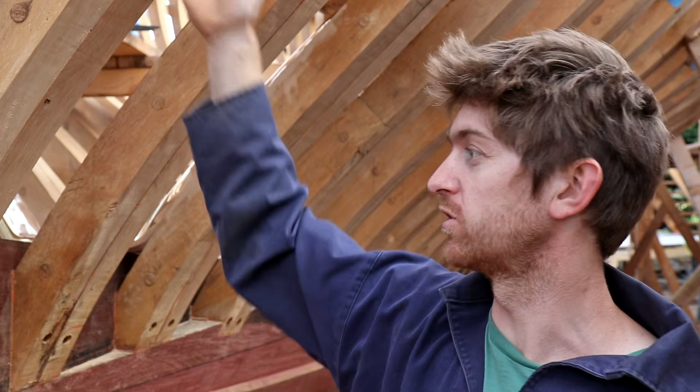This week we're going to be focusing on lining off the hull for planking, and what that means is the process basically of working out the position and the widths of all the planks which are going to lay on the frames here. Now you may think you could just slap them on any old how, or just start from the bottom and work up, or even take the whole width and just divide it equally, but actually it's not as simple as that. You can do, but you'll end up in a mess.

There are few things that do as much to accentuate the beauty of a wooden hull as well lined off planks. Alas, the opposite can also be true. A poor lining job can make the best design seem out of balance, the finest construction appear slipshod and suspect. Worse, inattention to plank placement can cost time and waste material.

Above the waterline you will be able to see the plank seams through the paint, so in that area it's important to keep all the planks relatively the same width in any one place, and they will all have to taper down smoothly to be slightly narrower on the ends than they are in the middle. Below the waterline it's more about conserving the planking stock and also making it easier to actually hang the planks.

But before we can line out, we've got some preparations to do, and we've got to meet the newest member of the team. She has just joined us and she's hopefully going to be here for the long term in a bit more of a sort of apprenticeship style role.

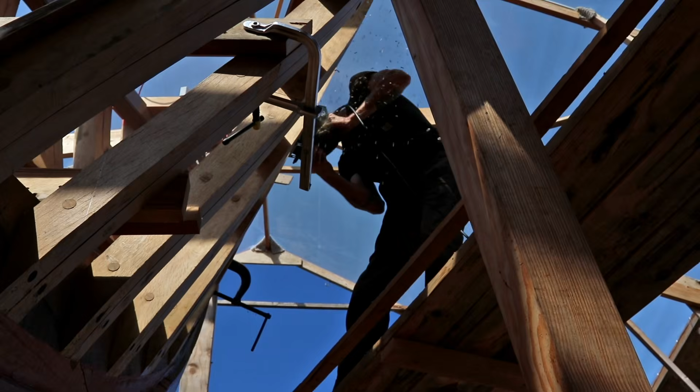Hi, my name is Rosie, and I came up here from Portland, Oregon, where I was most recently working at a door and window shop, and before that I was working in construction. I grew up in Boston, and I heard about the Tally-Ho project from a friend of mine at a boat building school in Spain, where I spent a little bit of time last year. Part of the reason that I came up here to work on this boat is that I've had an interest in boats for a long time.

I grew up sailing around Boston with my dad, and I've been working in carpentry for a little while now, and it's kind of a dream or a goal to transition into the boat building industry, which is why I'm hopefully going to be up here for the long term and stay around and learn a lot from different people who come and work on the boat.

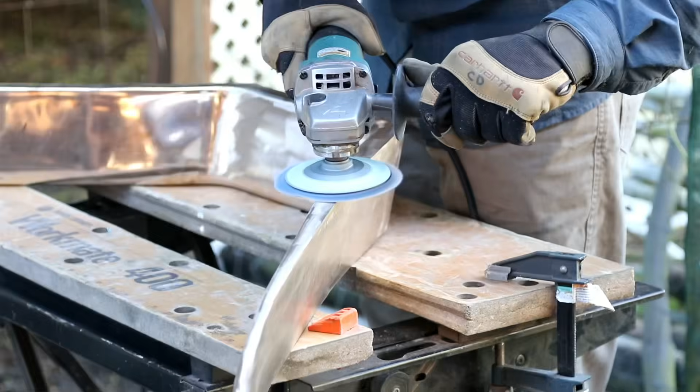So he said just give it a thwack? Yeah. All right. I think it sat down a little.

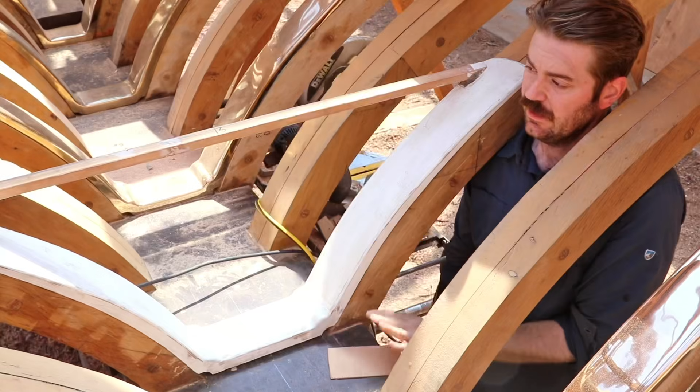If you recall back to the video where we actually made these, we made them sit about 1/8 of an inch off the keel timber. We were trying to game the shrinkage of the bronze, so we thought that if we built it 1/8 of an inch off the keel, it would shrink just enough to drop down.

Well, it turns out the mold swell actually counteracts any of the shrinkage that we're seeing, so most of our finished floors, after we get them back and we put them in the boat, sure enough, they're riding about 1/8 of an inch high. So something we're considering doing is going back to the patterns that we haven't cast yet and adding just another piece of door skin to the bottom of the keel plate which would then make them sit flush when we get them back from the foundry.

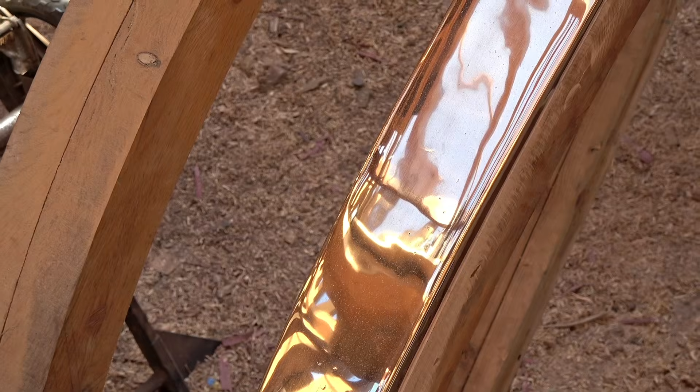I am just working out how much stock I need to buy to make some battens for lining out the boat for planking. The size of the battens we need, how many we need, and how much material I need to buy to make them, and how we're going to make them. And I need to make them before the weekend when we're going to hopefully line out.

So one of the things which really helps when lining out is having quite a few very, very long battens. Now I've already got a couple which I made when I was doing the lofting, but the more the better, so we're going to make a few more. And I decided to do an experiment: rather than trying to find some nice clear grained fir or something else to scarf into battens, I thought I would try layering up lots of sheets of door skin instead. Basically just to see if it might be a faster and cheaper way of making those long battens.

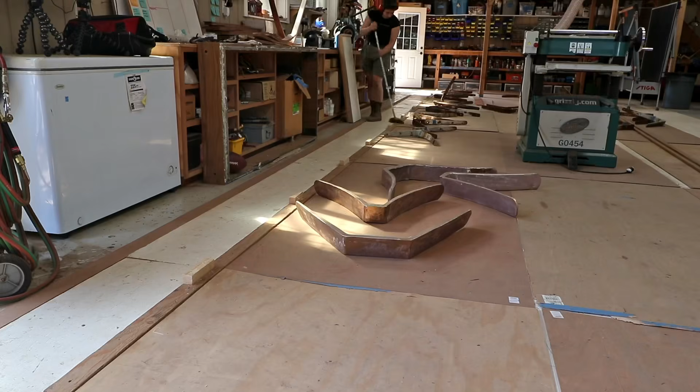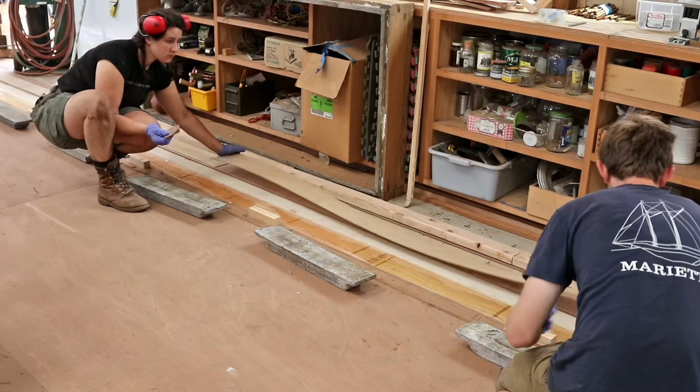So we've basically stacked up 6 layers of 1/8" plywood to make a 5" wide by 48-foot long batten. The next step is to cut the rough edges off it and then cut it into thinner strips, thinner battens, which will be a little bit more bendy. We do already have one very stiff long batten, and later on you'll see why we need that. But I'm hoping to get 3 or 4 thinner battens out of this lamination that we've just made.

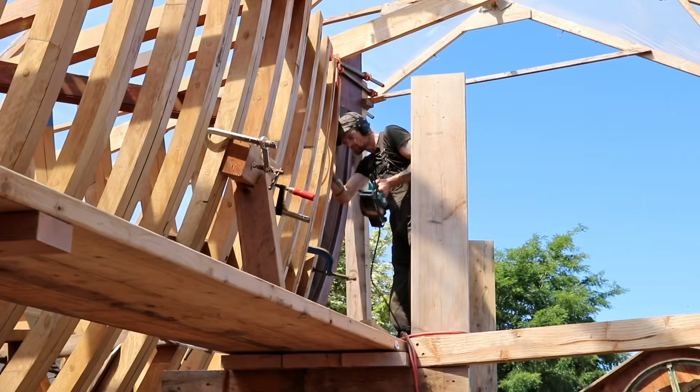Oh, Pete, it's my first day on the job. You're going to make me say it, aren't you? You don't have to say it, Charlie. Yeah, what am I doing? That's it. Do you want me to answer that? Yep.

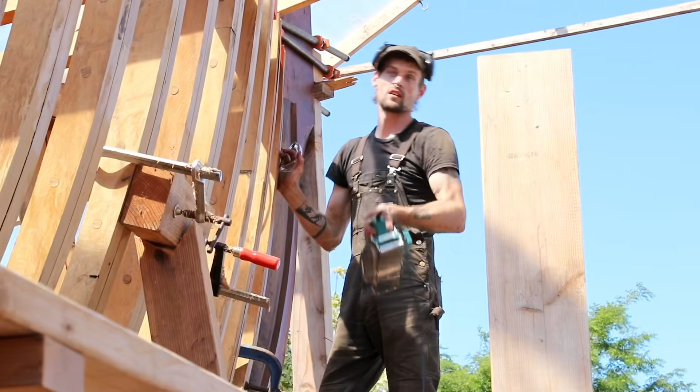Yeah? In preparation for planking, we're hoping to line out in a few days, so got some staging set up this morning. Feels pretty good to be off the ground. Just taking care of the topsides, which is kind of the most important part for making the boat look fair. It's all important, but this is really where it's going to pay off.

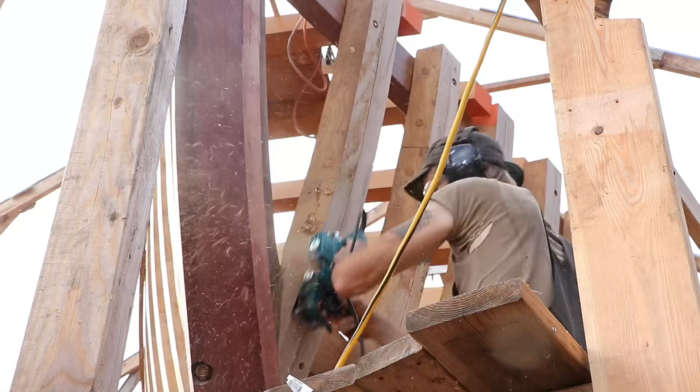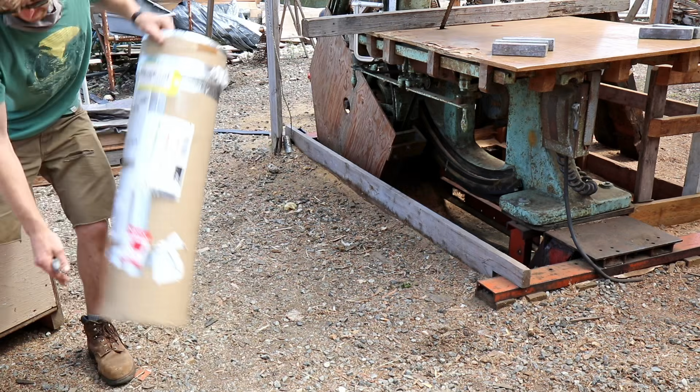Anyway, a couple of months ago I posted in that group asking for some suggestions on something I could use to cover the ship saw from the elements. Now I was only really expecting a few ideas, but a bloke called Aaron got in touch. He's a canvas worker and cover maker in Swan Reach in Victoria, Australia, and after a couple of emails and a few weeks, this arrived in the post today. So as you can see, Aaron has made a really nice cover for the ship saw.

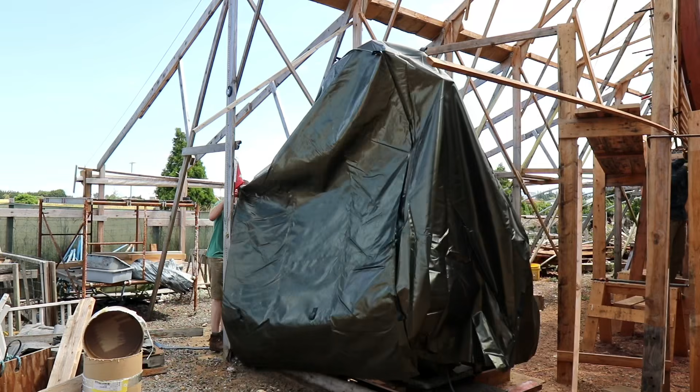So lining out is basically the process of determining the location and the sizes of all the hull planking. The first objective is to make planking easier by having planks that do not have excessive edge set or twist or too much bending really in any direction, and especially bending in and then out again.

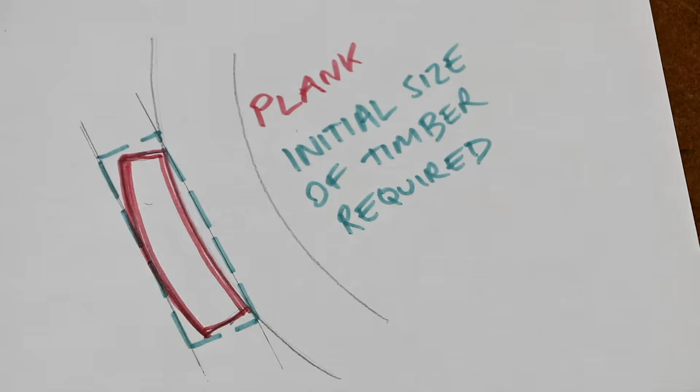Well, that might happen. Another objective is to have planks that are narrow enough to be able to plank around the tight corners of the boat, whether that's the concave corner of the tuck or the convex corner of the turn of the bilge, without having to carve too much shape into each individual plank and therefore losing a lot of width of the planking stock.

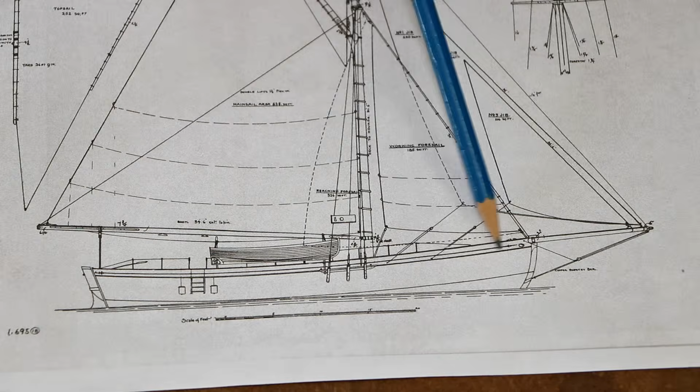As well as all that, the planks on the topsides of the boat, that is above the waterline, have to taper elegantly from midships, where they're at their widest point, down towards either end of the boat. They have to all be roughly consistent in width, and they generally have to create lines which are pleasing to the eye and complement the boat's shape.

I'm Tim Lee. I'm a member at the Port Townsend Shipwrights Co-Op and the lead boat builder on the Western Flyer. I heard Leo had planking coming up. I've done quite a bit of lining out. I used to teach at the Northwest School of Wooden Boat Building, so I built several boats. And I just asked Leo if he'd ever lined a boat out before, and he said he hadn't, and if he wanted help. So I came over to spend the day helping him line out.

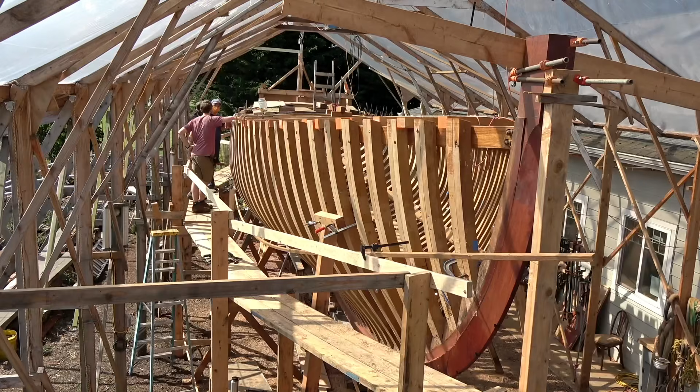What do we need, Leo? Well, that's Tim. What do we need, Tim?

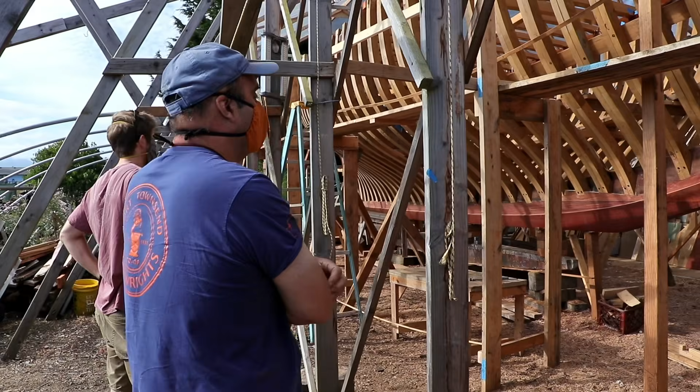You guys got your battens? Yeah. I would like to look at the pictures too, because I want to check and see if your sheer strake is wider. It is, yeah. Your broads, they're slowly getting wider. I see. But yours look like they were all about the same width. Yeah. So what I was thinking we could do is use a plank scale to do the top half and just get a number, and then do that section above your broads the same way. And so they would all be the same.

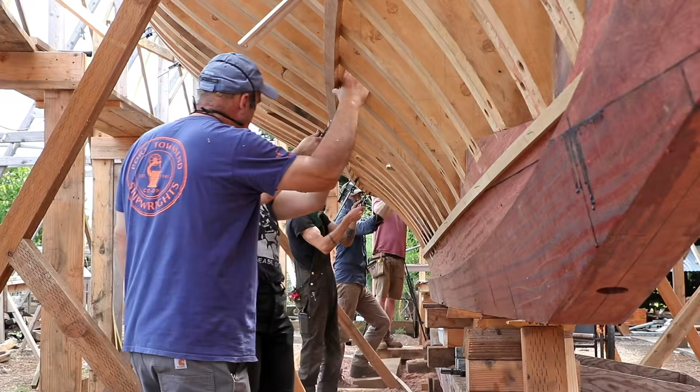In terms of the actual method, there's many ways to line out a boat and there's many places to start, but many boat builders agree that the tuck line is a good place to start. This is a line that starts somewhere in the tuck, just underneath the transom, roughly around the waterline or a little bit below, and then it follows the shape of the boat down well under the turn of the bilge, and then comes up in the bow, again around or just below the waterline.

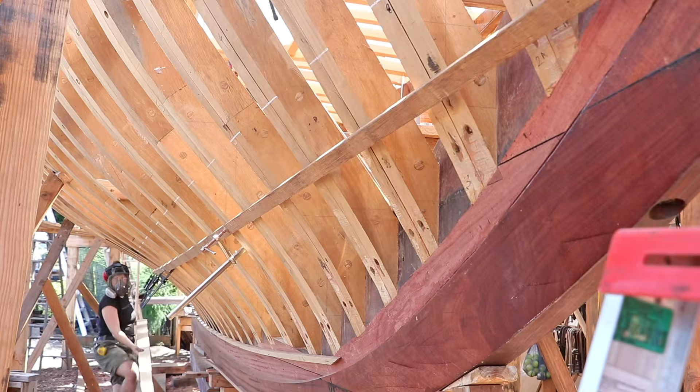The purpose of that line is really to separate two different areas of the hull, which have different characteristics in their shape. And when finding that line on the hull, it's important to use a very stiff batten so that you can find a line that isn't going to have too much edge set in a plank, it's not going to have too much twist, it's going to be a nice easy plank to lay, because that will dictate the plank that goes there and the planks around it.

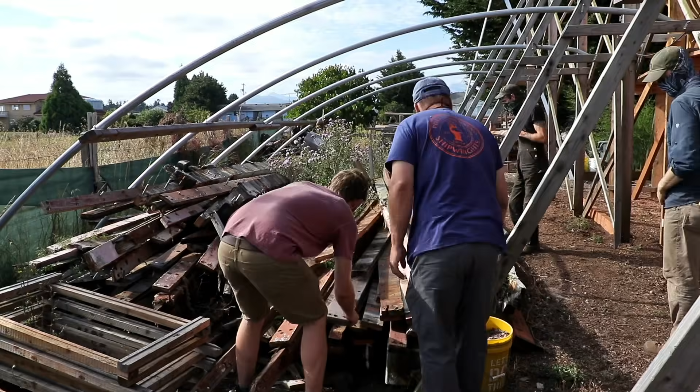Maybe this one. So you've got a pile of planking there, but you don't have any idea what your sheer strake is? Here it is. Oh, that's part of it. That's okay. Right at the stern. That's the stern. Pull that one out. Pretty near the bow, 5.5. Yeah, that'd be where the chain planks are.

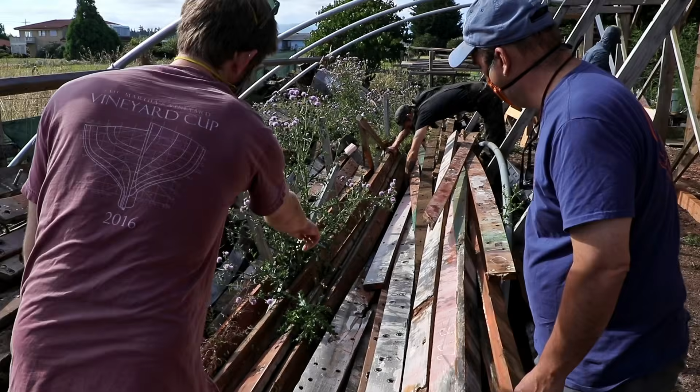There you go. Is the reason you want to start off the master line is it's the equator, right? It's that one straight plank. Yeah. So it's easy to establish that. Whereas if you're starting with a bent plank, it's easier to build a little unfairness into it.

Yeah. The top of the garboard's straight, but it's almost good to put a little bit of hollow, like 1/8 of an inch of hollow on either end, because when it twists up, it'll get a little bit of a hump there. So you want to really look at that plank when you put it on there, because you won't see that bump until you're like 2 planks up. All right. And then it'll keep moving up with the plank.

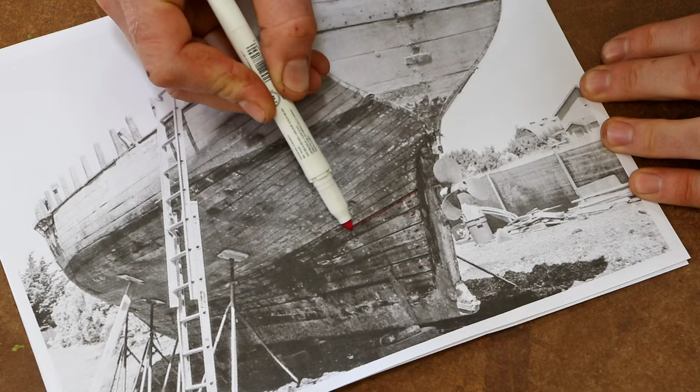Yeah. So underneath this tuck line, which we've just made, we may have a couple more normal sized planks, but underneath those we're going to get down to the broads, which are planks that are usually wider than the rest of the planks, and they certainly get a lot wider as they go aft towards the stern post to fill up that large vertical space there.

And often people insert extra little planks in this area called stealers, which basically enable you to split this large area into smaller sections to get away with narrower planks. It's especially useful if you don't have very wide planking stock. Underneath that you have the garboard, which is unique because the bottom of it is the rabbet, so it follows the shape of the rabbet.

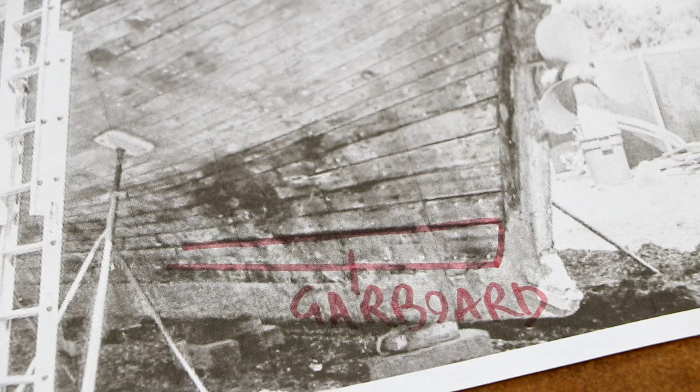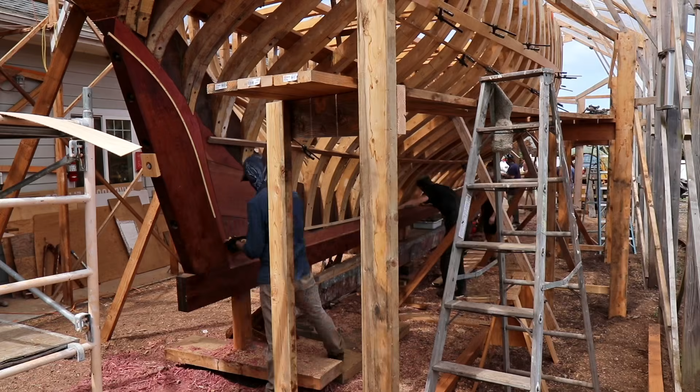That often has a lot of twist in it, so a lot of builders try to make the top edge very straight so that you don't have any short grain where it flares at the ends, because as you twist it that's more likely to break. But having that plank seam too straight can actually make it look like it's drooping down at the bow as you twist it in. Again, there's no hard and fast rules here. Tally-ho's garboard doesn't have very much twist in it actually, so I was able to have a plank with a little bit more shape in it here.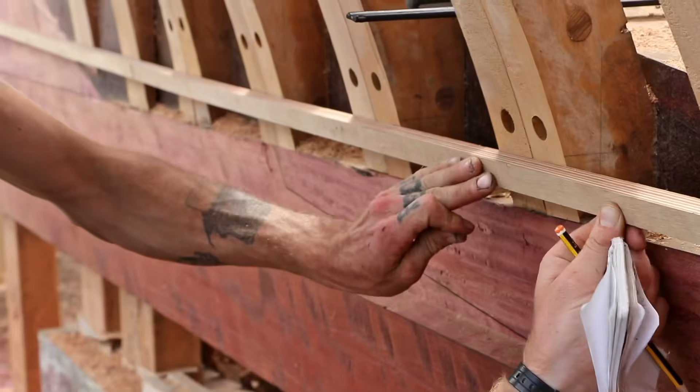Get up here. Is there a little tiny hump right here? No? If you hold this at the bottom of that, kind of midship, call that 72.5 or so.

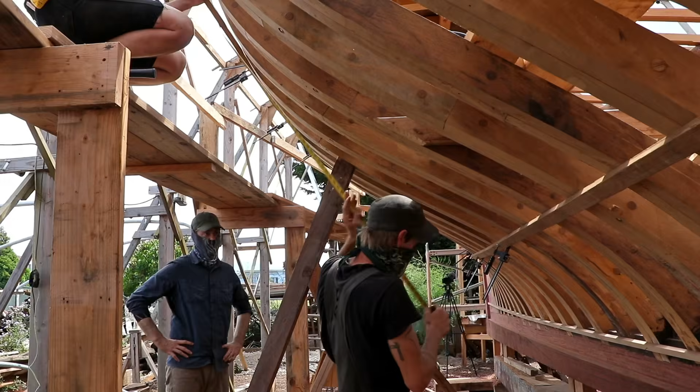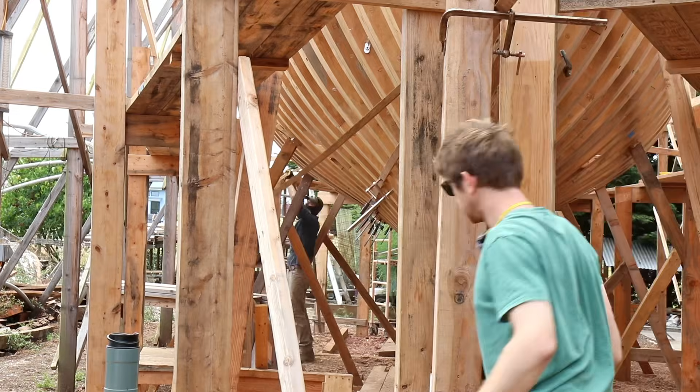Now the upper planks above the tuck are often, but not always, split into 2 sections as well. They would be the topside planks from the sheer down to where they just start touching the waterline, and the section in between could be called the middle planks. Adding another line here allows the manipulation of these 2 areas of planking. Again, there's no real rules here, but depending on the shape of the boat, there are several things to bear in mind about where you might want to make the planks narrower or wider, or taper slightly differently.

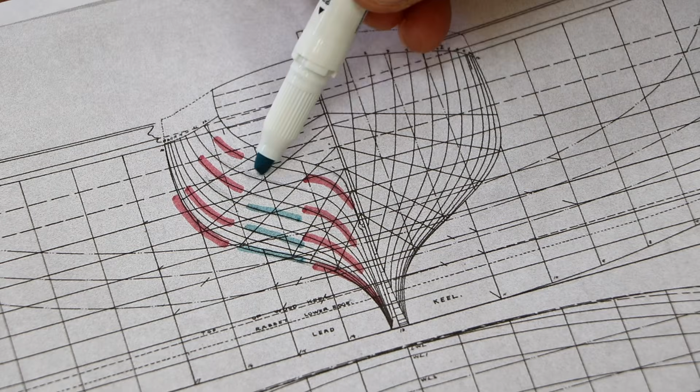So you'd want them to be narrower where there's a lot of shape in the turn of the bilge, in the tuck under the transom, and sometimes in the top part of the transom where there's a tight turn there. You can make them wider on the flatter areas of the hull, so just below the turn of the bilge where you have the largest flat spot, that's a good place to make up space with wider planks. And you don't want to make them too wide on the top sides of the boat, because that's an area which won't be wet all the time, and having narrower planks with more caulking seams helps compensate for the swelling and shrinkage of the wood.

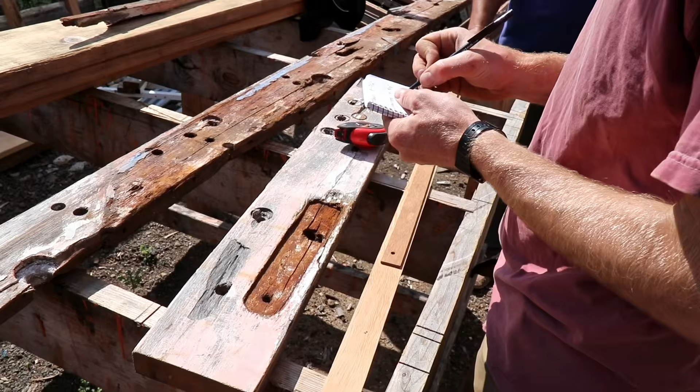All the planks have to have an adequate width at their hood ends to take 2 fastenings and still have plenty of material left. The hood ends just mean the ends of the planks where they fasten into the rabbet or onto the transom. And again, the topside planks need to look elegant and complement the sheer without exaggerating it too much. So these are all things which can be affected by changing the shape of that dividing line between these 2 sections of the boat, but you can't manipulate it too much.

You've got to draw it on the boat with a pretty stiff batten so that you don't get too much edge set. And the reason I keep going on about edge set is that unless you have really, really wide planking boards and you're happy to waste a lot of material, you can't cut a really curved plank out of a board.

And what that means is you have to cut it relatively straight, and then you have to bend it in a dimension that it doesn't want to be bent to get it to fit in the boat. And so that's edge set, and too much of that will make it very difficult or even impossible to get your plank in the spot where it needs to go.

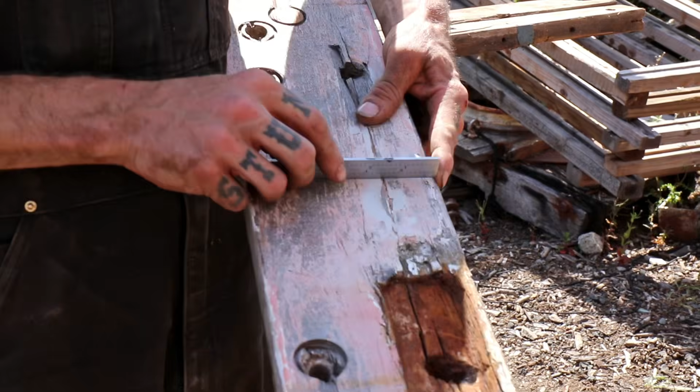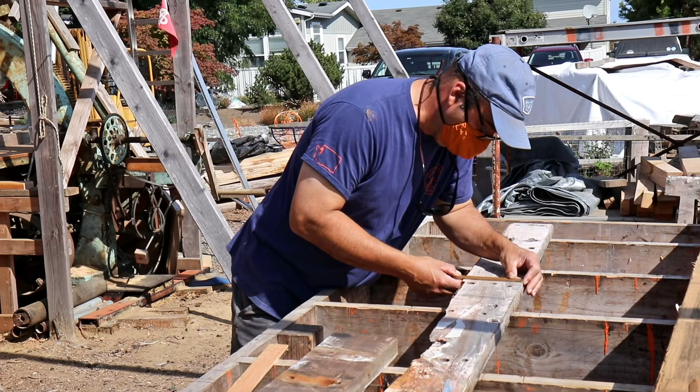On the outside? Sorry, sir. 5 3/8 on the outside. Subtracting 1 3/4 off of this, it's actually 1 5/8. I'm used to working on big boats. This is a big boat. 5 5/8. So what are we doing?

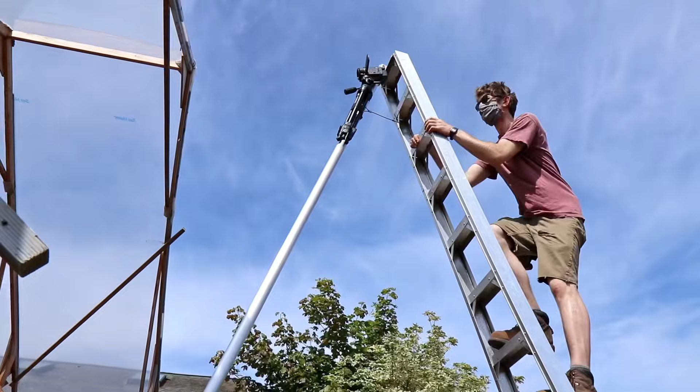So the sheer plank, like all the planks, tapers as it goes forwards and aft, and we've taken some measurements off the old sheer plank, and then we're joining all those marks together with this very stiff batten to try and get a nice fair curve. I can see a bit of a bump from here. That clamp you're on right now wants to come down. This one? Yeah. Either going up or down. Up. Bow it up a tiny bit might stop that.

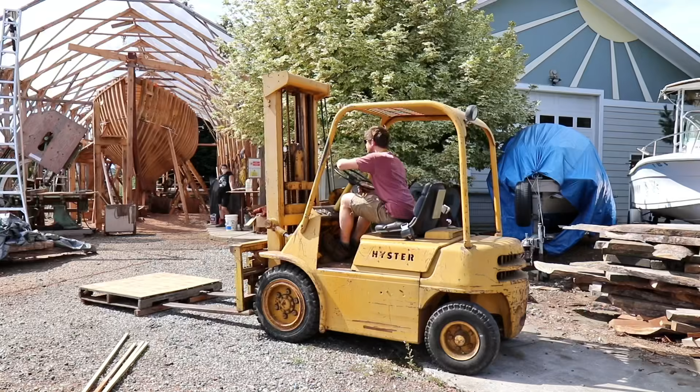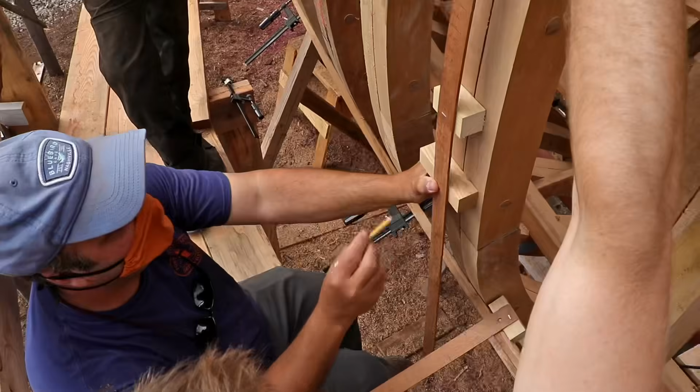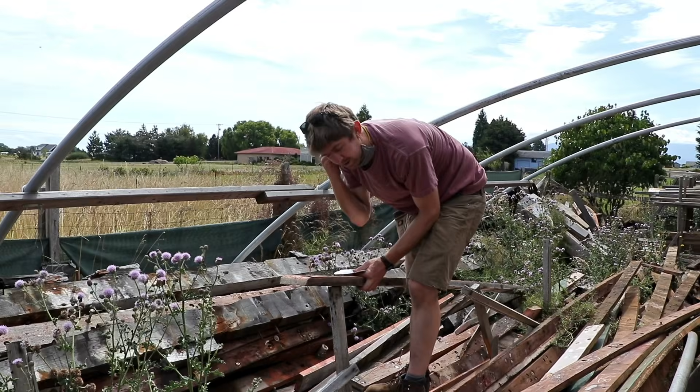I'm pretty happy with it. Yeah. So we're putting the bottom of the batten on the line. Which plank are you looking for, Leo? I'm looking for the transom hood end on a topside plank, which I found, and it's 4 1/4, 4 1/8 actually. We got 4-1 on the transom hood ends on the top sides.

Once you've got all your lines established, and you should know by now roughly how many planks are going into each section, then at each station or frame you divide that width of that section into the number of planks, and that will give you the width of each plank in that section at that frame. You could just do this with maths, but one tool that we used for this operation is called a plank scale. It's basically just a strip of plywood, and say you've worked it out for 10 planks, because you know that you're going to have 10 planks in your section.

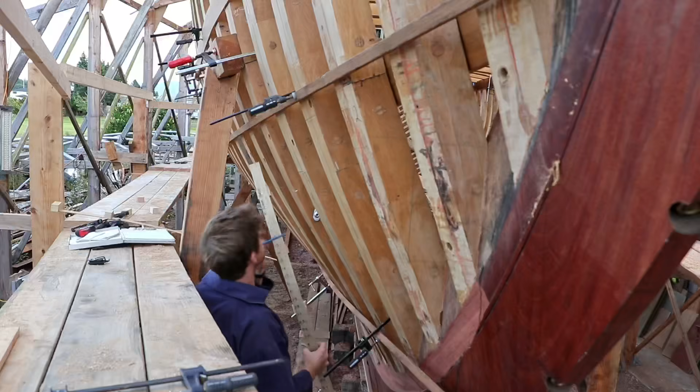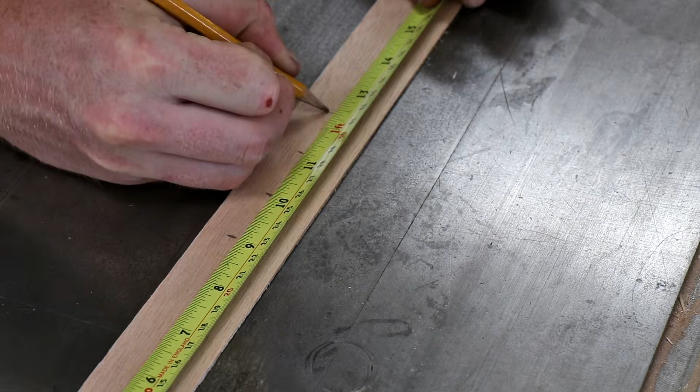Then you can lay it up on any frame within that section, and the number that you read off it will tell you the width of each plank in that section. You can have several different plank scales for different numbers of planks, so that if you have a section defined, you can try the different plank scales on it and say, well, if I had 10 planks here, they would be this width. If I had 11 planks here, they would be this other width, and so on.

To really understand how the plank scale works, imagine if every plank was 1 inch wide. Well, of course, if you had 10 planks, they would take up 10 inches. Now, if they were all 1 inch and 1/8 wide, then that would be an extra 10/8. And so the first mark on the plank scale would be 10 inches and 10/8, or 11 1/4. And that would be marked 1-1, meaning 1 inch and 1/8 per plank.

If each plank is 4 inches and you've got 10 of them, of course, that's going to be 40 inches. So at 40 inches down the plank scale, it would say 4, meaning 4 inches per plank, and at 40 inches and 10/8, or 41 1/4, it would be notated 4-1, meaning 4 inches and 1/8 per plank. This is a very traditional way of notating inches and eighths.

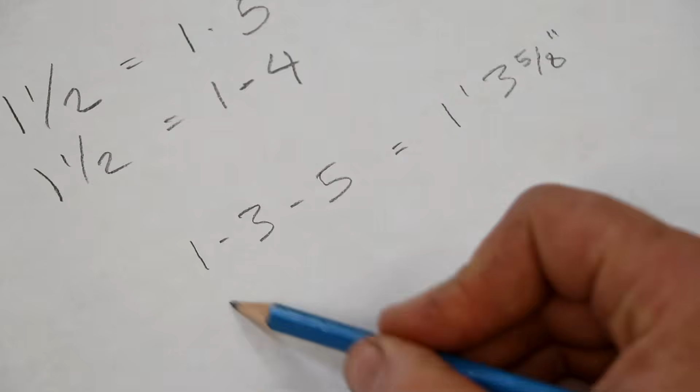If you want to go to finer detail, you put a little plus mark next to it, which means 1/16 over the amount of eighths that you've written down. And it's basically just like counting in base 8. It's just important to know what system you're using, because of course some people use the decimal system with inches. In that system, 1.5 inches would be 1.5, but in this more traditional system, 1.5 inches would be 1.4 or 1-4. If you see 3 numbers notated like that, say 1-3-5, that would mean 1 foot, 3 inches and 5/8. If it said 1-3-5 plus, that would be 1 foot, 3 inches and 11/16.

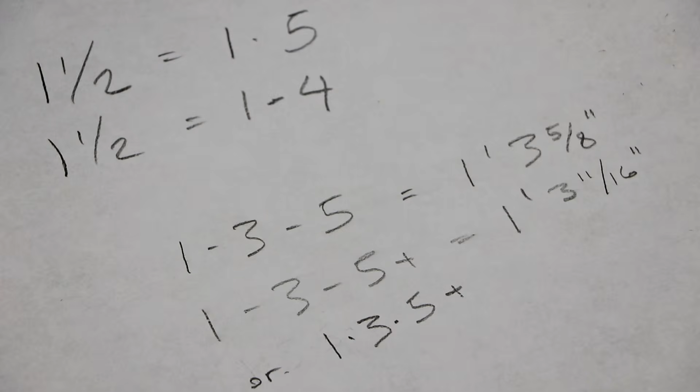When I first heard about this and I asked what you should do when you get to 30 seconds, I was told there are no 30 seconds in boat building. And certainly when you're talking about the hull and these kinds of measurements, you really don't need to get any more precise than the 16th. And I know most people outside of the States, apart from maybe a third of the UK, are going to be wondering what on earth I'm talking about right now.

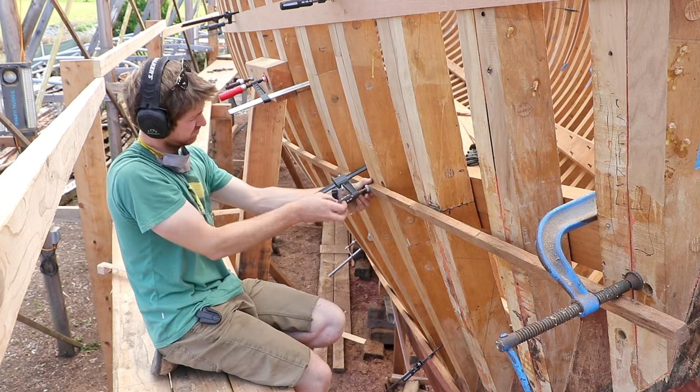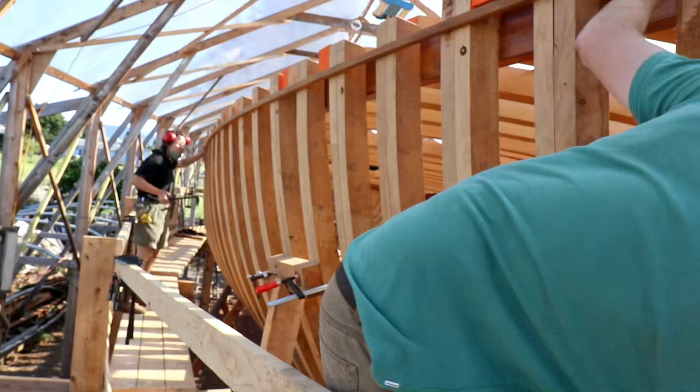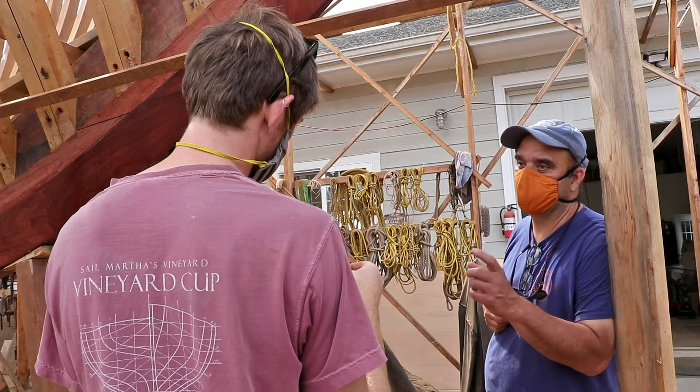Top sides with 3.5 or 3.6. Oh, that's not bad. So they're slightly, well, they're about the same. It's 3 5/8. It's within. Yeah. Right, so that's great. And then if you wanted to adjust that to make it narrower or fatter, you can put either 1 or 2 lines in between there. Yeah. And then you just do the same thing, but that's it.

Yeah. Now you know how to lay out a plot line on a boat. Ooh. That wasn't so hard, was it? Pete thought we'd be here till forever. But it's not even beer o'clock yet. It's always beer o'clock.

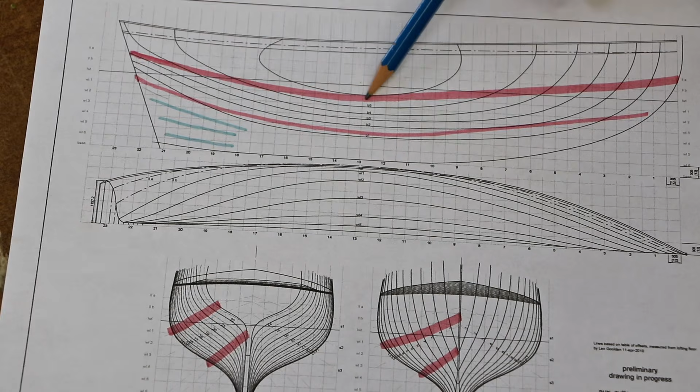So on Tally Ho, after I had spent a long time manipulating and playing with this top line between the 2 areas of upper planking, I took my plank scales and I measured what the width was going to be of all the planks on all the different stations. And it actually turned out that the way I had finally placed my batten actually made the plank widths above it and below it very, very close to identical.

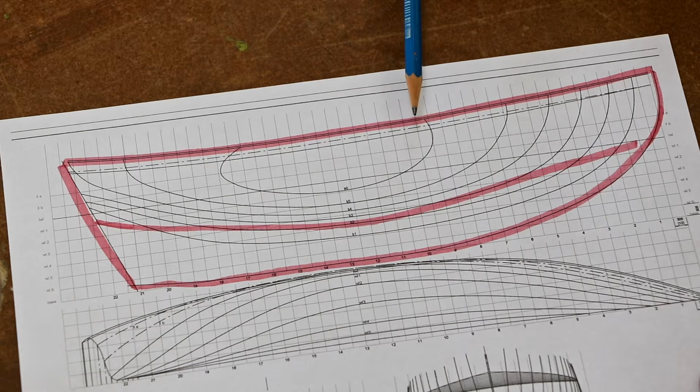And so of course I decided to actually just scrap that batten and treat that whole top section above that first tuck line we drew as one big section with 20 planks in it, and split it up evenly so that each plank will be roughly the same width on each station all the way along the boat. Apart from the sheer plank, the topmost plank, which will be a little bit wider than the rest of them as per the original boat, but it will taper evenly with the others. I was pretty happy it worked out this way.

I hope I'm not missing anything, but I've checked and rechecked all the plank widths at different areas. I'm confident that the planks are going to go around all the tight corners nice and easy. The hood ends are the right size, and I think the tapering of the topside planks will look elegant and smooth.

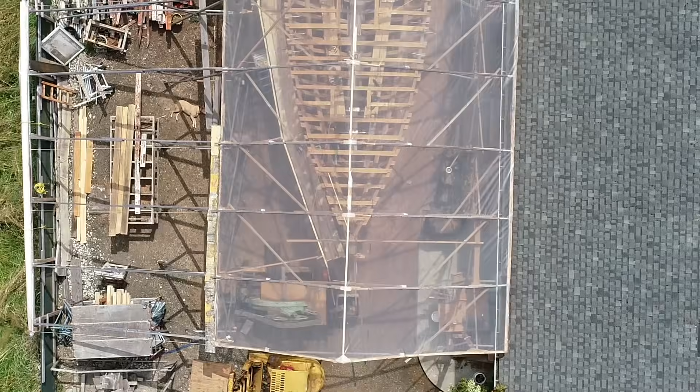It should be noted that throughout this process we were measuring the original planks of the boat, which I had piled up next to it, and using those as a rough guide to the widths that our new planking should be. As with any old boat, planks have been replaced, things have been changed, things have moved, and so we can actually improve it hopefully by making it more consistent, and hopefully that's what the original builders and Albert Strange would have wanted.

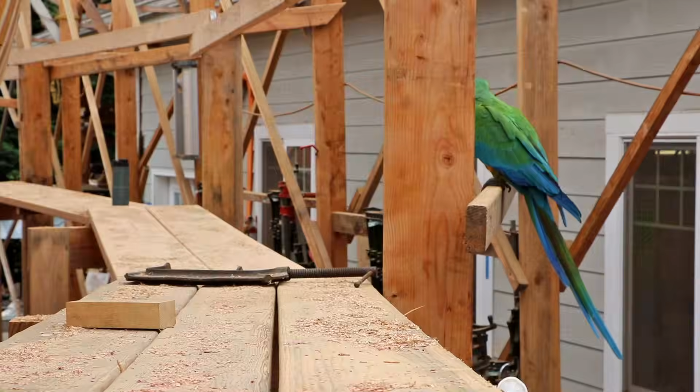So it's been a really interesting week for me. I got to learn something new, which is always challenging and exciting. I found with the lining out, although I was able to find a lot of different methods through talking to different people and through reading different books, I found it hard to get a really clear picture of what the essential goal of lining out was and the reasons why these methods work.

Personally, I find it really hard to just follow instructions without really understanding the why behind it. And so what I've tried to do in this video is give more of an explanation of why these steps need to be taken and the goals of lining out properly. There's no way I can show you all the different methods for lining out, and I certainly don't know them all either, but if you understand the reasoning behind it, then I think all the methods should start making more sense and you can just pick and choose one that works for you.

I realise that many people watching this video will probably never line out a boat, and that's fine, but for the few who do, I hope this video lets you approach that task with a little more understanding and confidence.